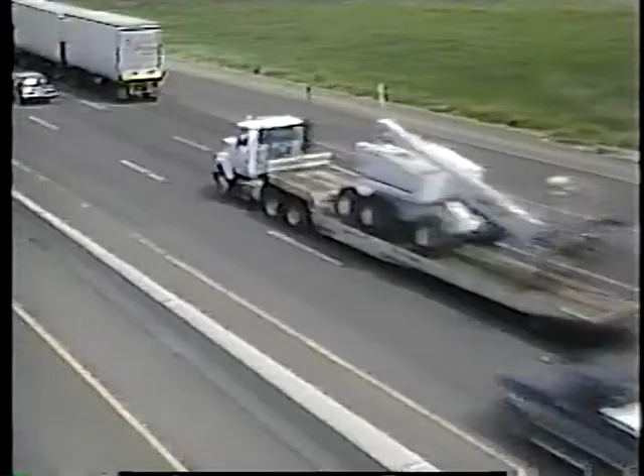Miles of roads, more cars, and more truck traffic than ever before. Most of our personal travel and freight moves over highways. The nation's economy and quality of life depend on the good condition of our roads.

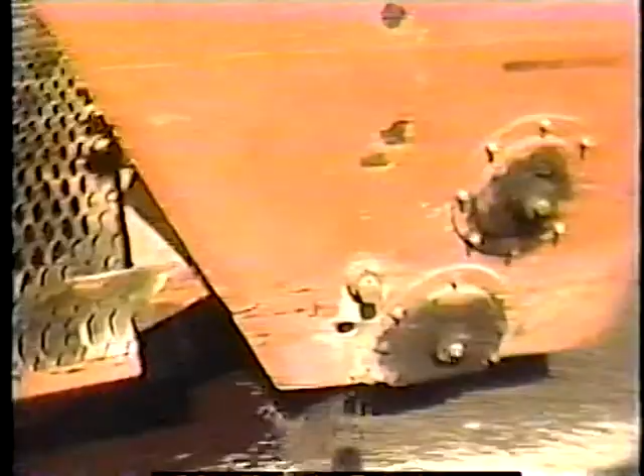Although the demands placed on our highway system have increased, the level of funding for public road construction and maintenance has remained fairly constant. As these trends continue, highway agencies will have to make ever more efficient use of the funds that they have. To enable highway agencies to meet this challenge, Congress created the Strategic Highway Research Program, or SHRP, to achieve rapid progress in highway technology.

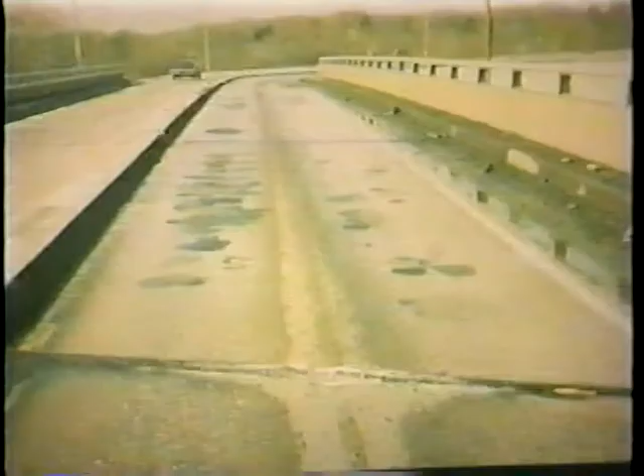SHRP is a 5-year, $150 million program administered as a unit of the National Research Council and funded through a set-aside of 0.25% of state-apportioned federal highway aid funds. SHRP is seeking solutions to common but costly problems. Problems like pavement deterioration, bridge corrosion, snow and ice control.

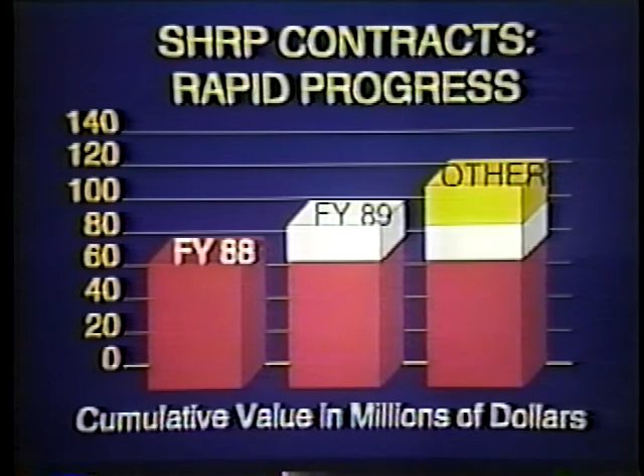The pace of activity since startup in April 1987 has been rapid. By December 1988, SHRP had awarded 64% of its budget for planned research. Most of the other research projects are scheduled to begin in fiscal year 1989. SHRP contracts are awarded on a competitive basis to researchers at universities, private companies, and non-profit organizations.

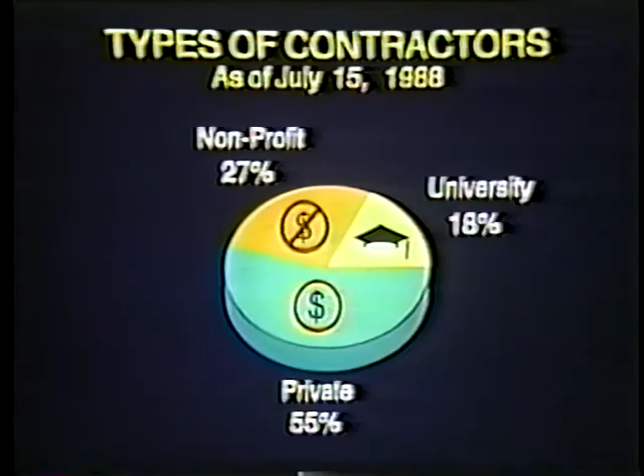Asphalt, pavement performance, highway operations, and concrete and structures were selected as target areas for SHRP research by expert panels that included representation from state highway agencies, industry, and research organizations. Let's look at the objectives in these areas and the progress that is being made.

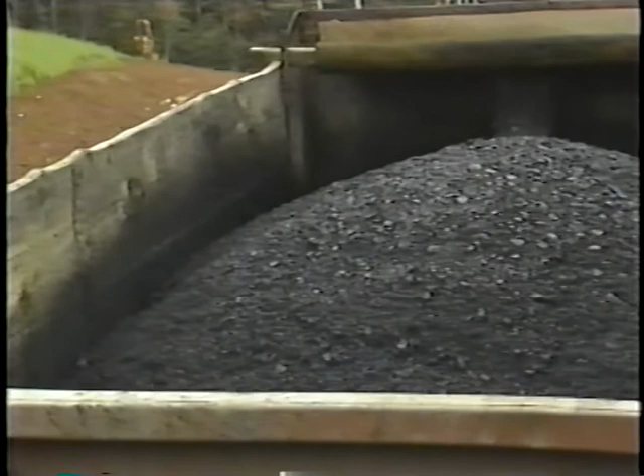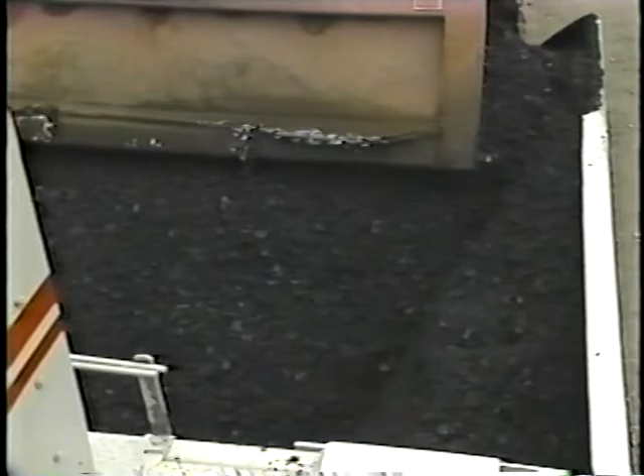Asphalt is used on 93% of the paved highways in the United States and accounts for about $10 billion a year in highway expenditures. Most asphalt pavements last about 20 years, but some fail rapidly, and these failures are costly to all involved. High-performance asphalt pavements have the potential to save highway agencies millions each year. The causes of asphalt pavement failures are often difficult to pinpoint.

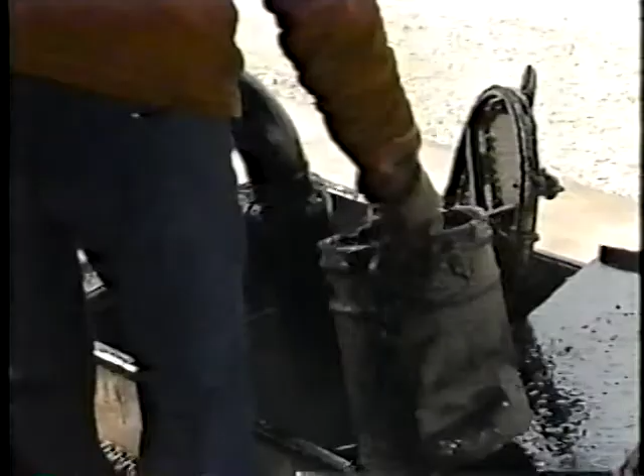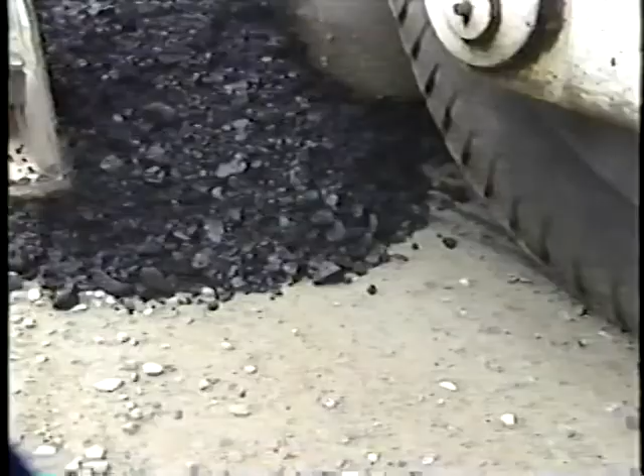Pavement performance can be affected by oil recovery and asphalt refining processes, by storage, handling, and transportation practices, by pavement mix design and construction procedures, soils, and once in service, exposure to traffic and weather. SHRP's asphalt research will focus on two key products that will improve asphalt performance: performance-oriented binder specifications and accelerated tests of asphalt aggregate mixtures.

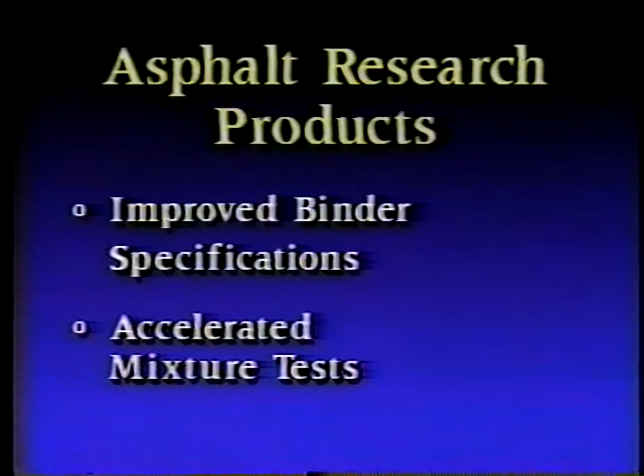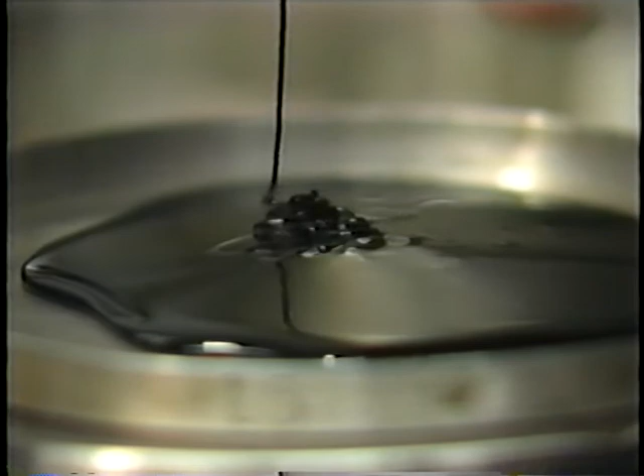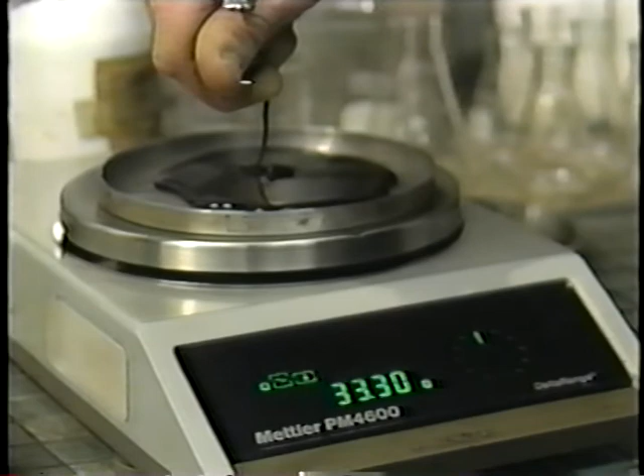The composition of the asphalt materials available in the U.S. market is highly variable because the crude oils used in the United States come from hundreds of sources around the world. This variation makes asphalt binder performance particularly difficult to predict. Dozens of different acceptance specifications for asphalt are currently in use in the United States. SHRP will develop improved asphalt binder specifications that will screen for properties more closely linked to pavement performance.

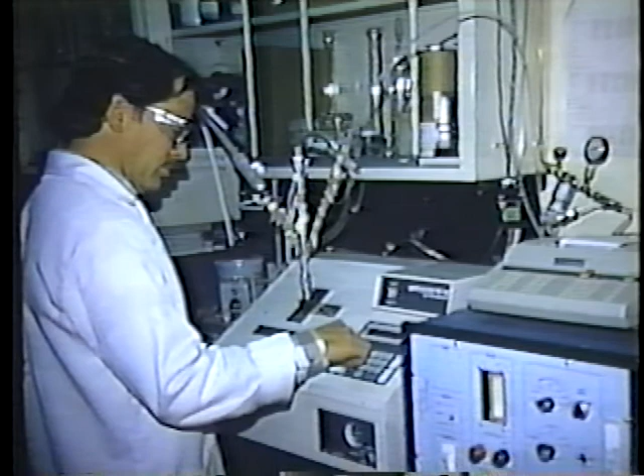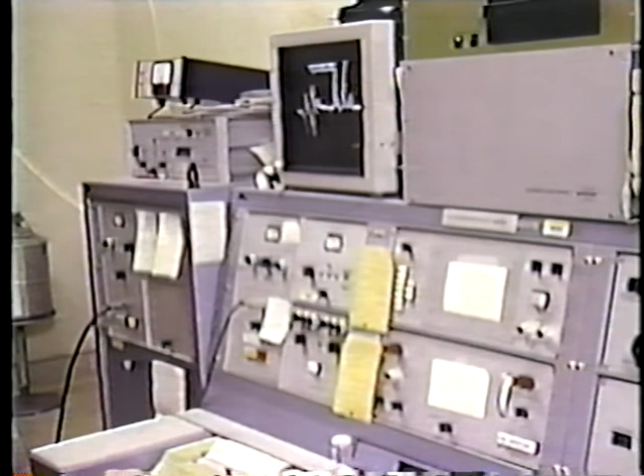SHRP's research plan starts with in-depth investigation of binder materials. Scientists at Western Research Institute at the University of Wyoming are applying sophisticated new techniques to investigate asphalt properties that may be related to adhesion, fatigue, aging, and other performance characteristics. Another high-tech approach to asphalt characterization is being pursued by SHRP under a joint project conducted by the National Institute of Standards and Technology with the University of Montana.

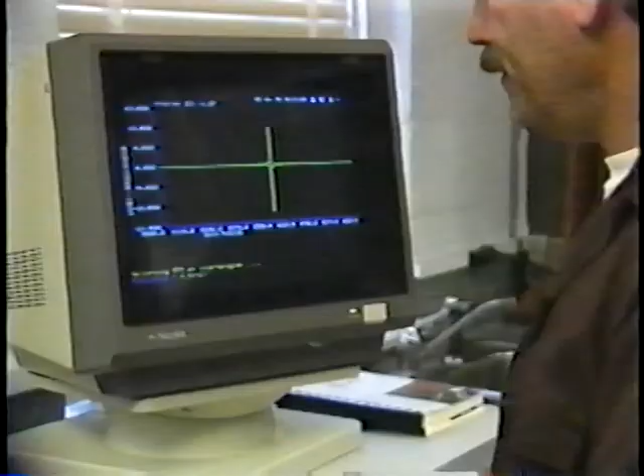They are using nuclear magnetic resonance spectroscopy to learn more about the chemical structure of asphalt materials and how composition changes under various conditions. By applying all of these state-of-the-art materials characterization techniques, SHRP is identifying and measuring the performance-related attributes of asphalt binders. The other key task is to determine how these attributes affect the performance of asphalt aggregate mixes. The University of California at Berkeley is exploring new, accelerated performance-related tests for prediction of the field performance of asphalt binders and mixes.

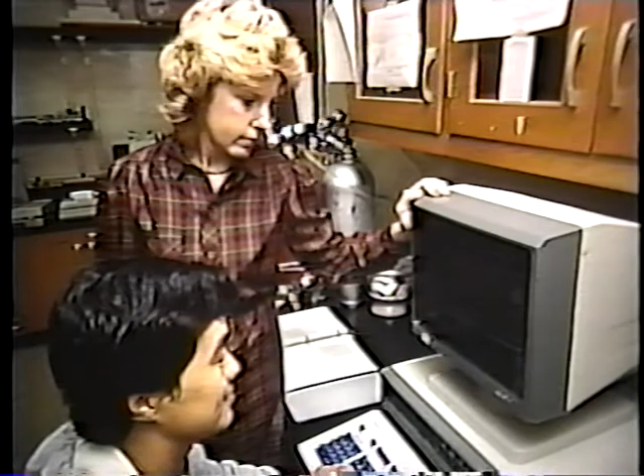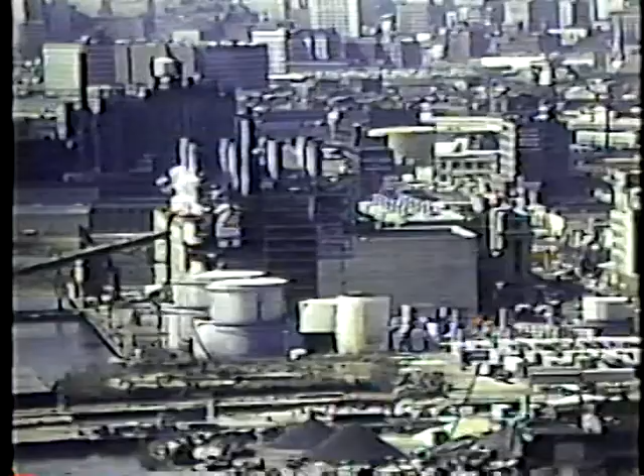Research dealing with the crucial asphalt aggregate interface is being conducted by the National Center for Asphalt Technology at Auburn University. The goal is to determine which fundamental interactions will create strong asphalt aggregate bonds. The Asphalt Institute conducted a survey of asphalt refiners in the United States and Canada for SHRP. Preliminary results show that virtually all the asphalts used in the United States and Canada are blended, and that the vacuum distillation process is used by about 2/3 of producers.

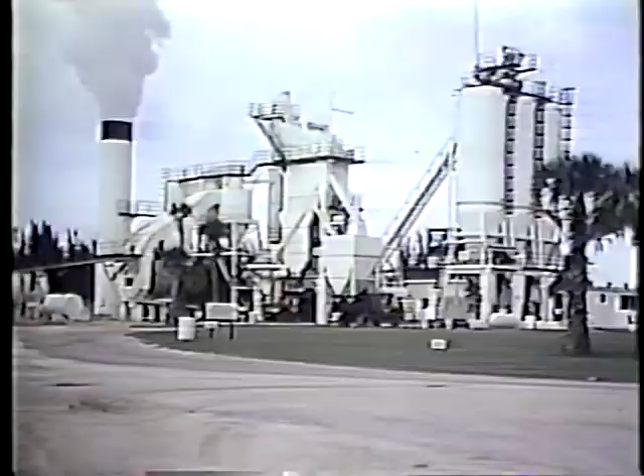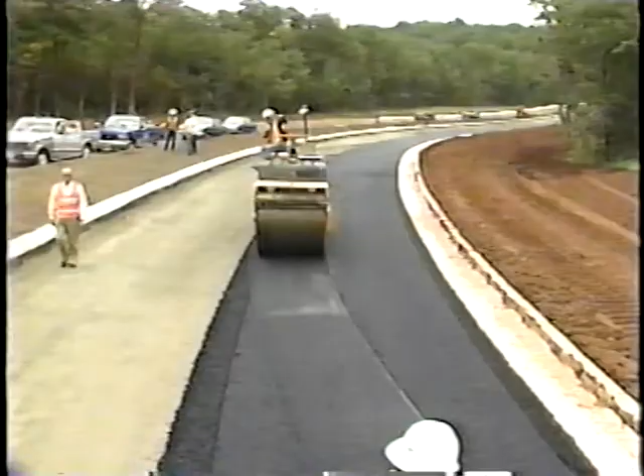To ensure the comparability of research results, SHRP maintains a materials reference library in Austin, Texas. 30 binders and 11 aggregates are stocked for distribution to researchers. Asphalt paving technology must adapt to continuing changes in the types of asphalt materials available in the U.S. market. By applying the most sophisticated techniques available to the analysis of asphalt materials, SHRP will enable industry to develop performance-oriented standards for the asphalt pavements of the future.

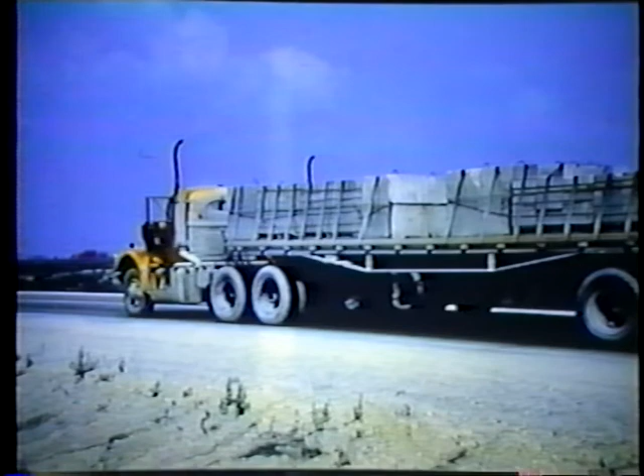Current pavement design practices are based on results of a road test that was completed more than 25 years ago. This road test was an accelerated field test of pavement performance conducted in a single location under uniform loading conditions. Trucks were driven around a test pavement and the resulting deterioration was measured.

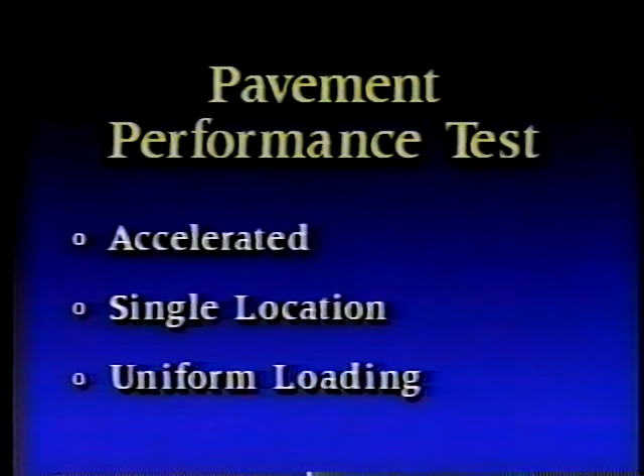SHRP's long-term pavement performance, or LTPP program, is broadening and deepening available data on pavement performance by monitoring the condition of more than 1,000 pavement sections. The resulting data will help highway engineers tailor designs and maintenance treatments to specific conditions.

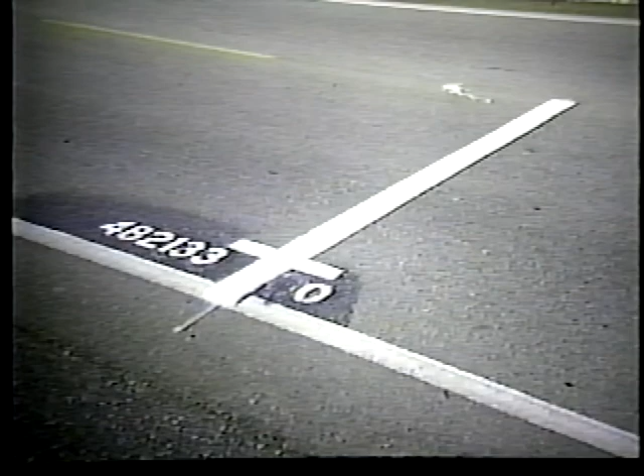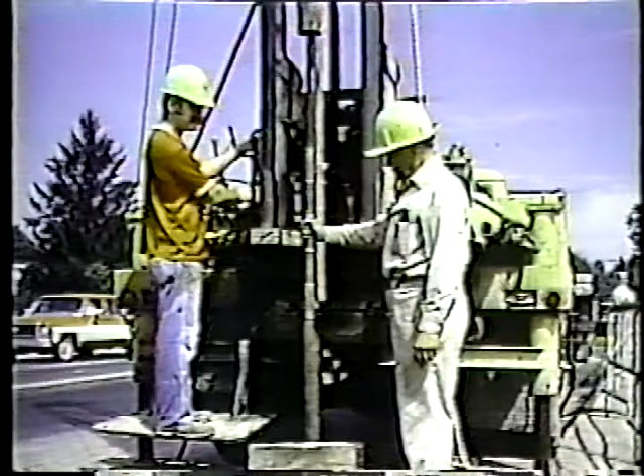All 50 states and the Canadian provinces are cooperating with SHRP by providing test sites, which are 500-foot-long sections of existing in-service highways. The highway agencies are providing SHRP with pavement design, construction, and maintenance records, as well as traffic data for each test section. SHRP conducts extensive core sampling to develop a detailed inventory of material characteristics at each site.

SHRP has purchased 4 falling weight deflectometers to measure pavement strength at the test sites. Roughness is another important pavement characteristic. SHRP's pavement profile measurement devices, or profilometers, take periodic roughness measurements at the test sites.

SHRP also takes continuous photographs of the test sections, using a camera mounted in the bottom of a moving vehicle. The photographs clearly reveal deterioration and make it possible to monitor the progress of pavement distress over time. The performance data will be stored along with the traffic and materials information in a permanent National Pavement Performance Database maintained by the National Research Council's Transportation Research Board.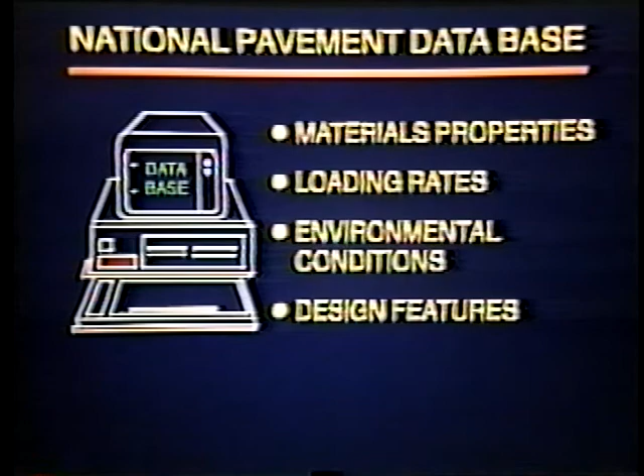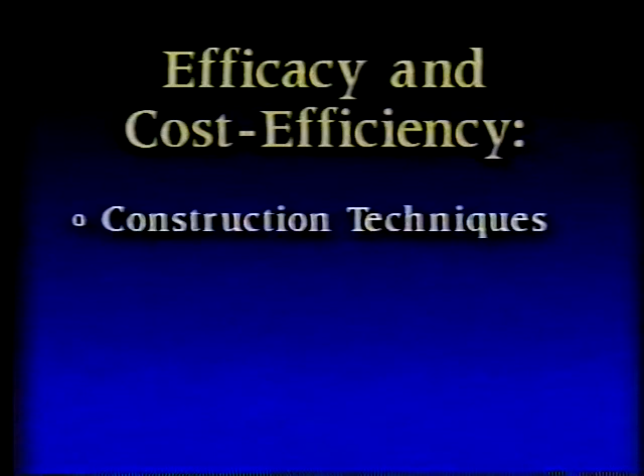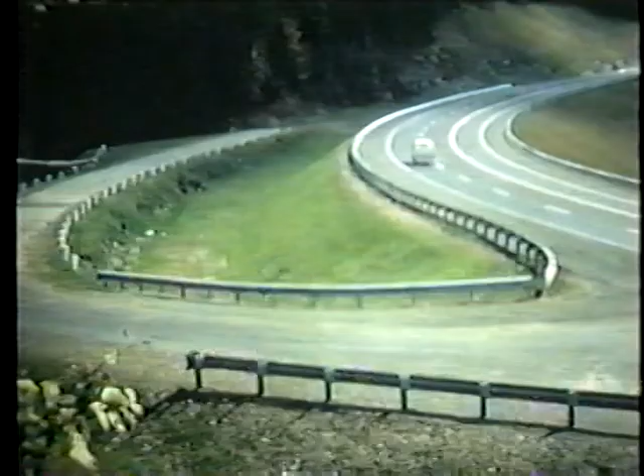The pavement performance research will yield a wealth of useful information about the efficacy and relative cost efficiency of various construction, maintenance, and rehabilitation techniques. Analysis of the data will yield equations describing pavement deterioration rates that are applicable to pavement design and to highway management decision-making. The information obtained through SHRP's pavement performance research will give us the tools needed to extend pavement life, yielding better payback on funds spent on highway construction.

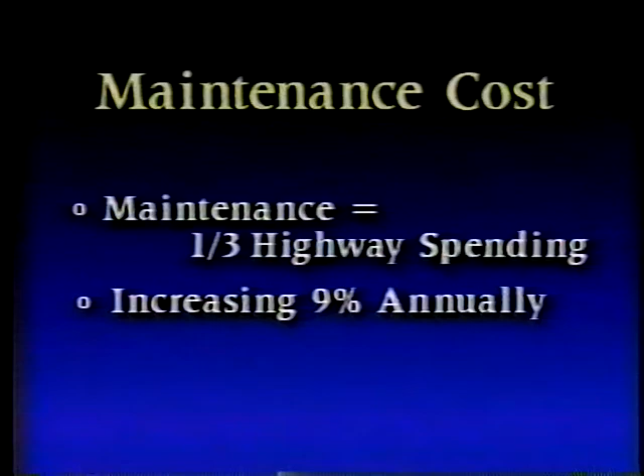Maintenance costs big money. Maintenance expenditures account for about 1/3 of total highway spending and have been growing at a rate of nearly 9% annually. It has become essential to find new ways to control maintenance costs. One way to squeeze the most out of every maintenance dollar is to select maintenance treatments that are well suited to specific pavement, traffic, and environmental conditions.

Building on experimental designs developed by Texas A&M Research Foundation, SHRP will evaluate the performance of various pavement maintenance treatments on side-by-side test sections on in-service roads. The results of the performance evaluations will be used to develop criteria for selection of maintenance materials.

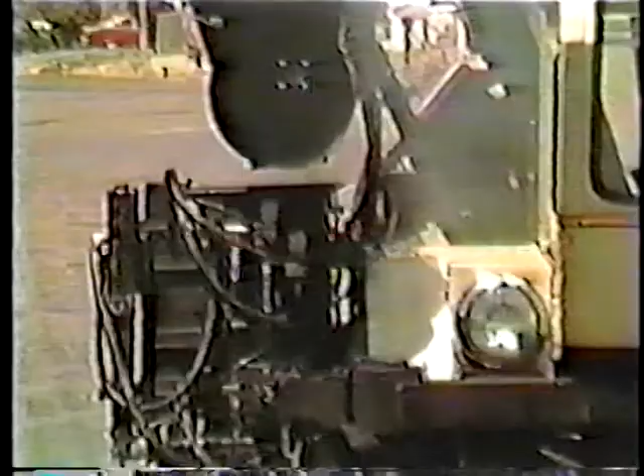Routine tasks like patching or sealing lend themselves to mechanization, but most maintenance work is still done manually, which is not only inefficient, but exposes workers to traffic hazards. SHRP is evaluating automated maintenance equipment and will determine what types of innovative equipment are most effective.

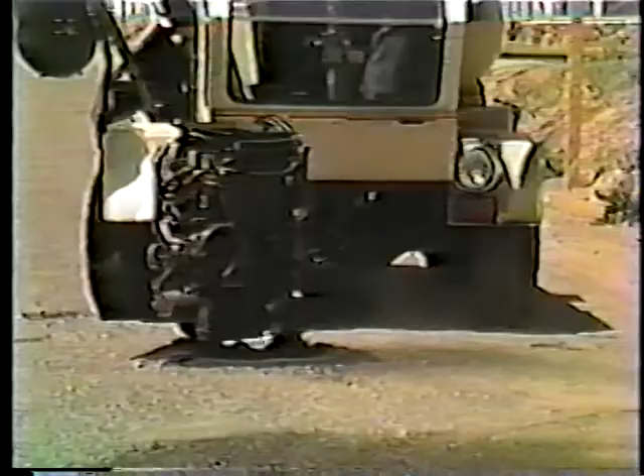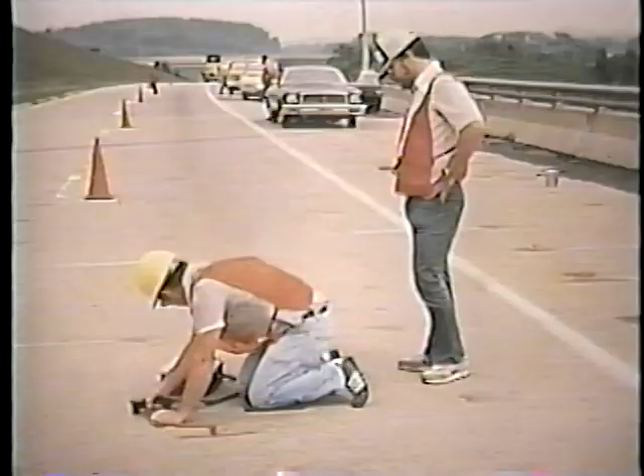SHRP also is addressing the important problem of worker safety. Highway maintenance is an extremely hazardous occupation, especially at temporary work sites without permanent safety barriers. SHRP is actively searching for innovative ways of protecting maintenance workers. Based on a design competition, SHRP will develop prototype devices and techniques to improve work zone safety. Examples of the products that might result include robotics to replace workers in hazardous positions, improved barrier devices, ways of speeding up maintenance operations to minimize worker exposure, and more effective methods of warning and communicating with drivers.

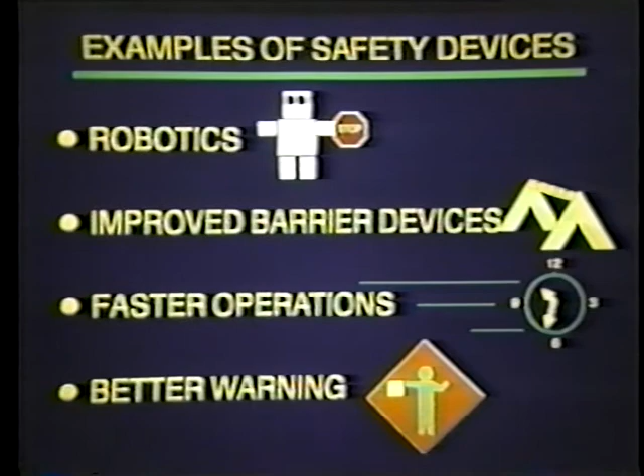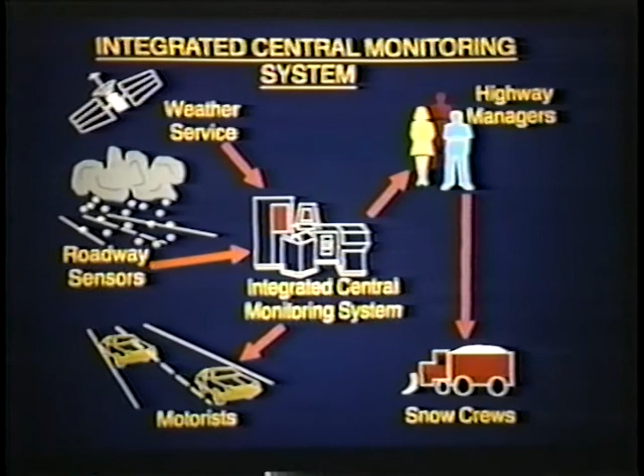Through SHRP, the latest technical know-how also is being applied to the age-old problem of the weather. The University of Wyoming is developing designs for innovative snowplows that will adapt to different kinds of snow and ice. When winter storms come, highway agencies need quick and accurate information about weather and road conditions to mobilize crews and equipment most effectively. Matrix Management Group of Seattle, Washington is developing integrated communication systems from existing components that will link weather services, highway maintenance managers, and road crews to provide nearly instantaneous coordination.

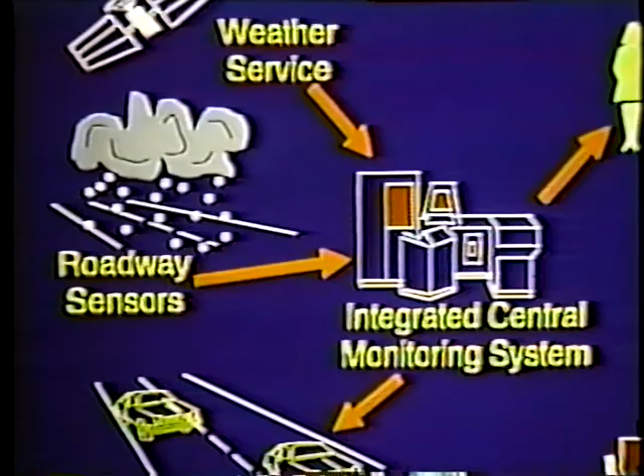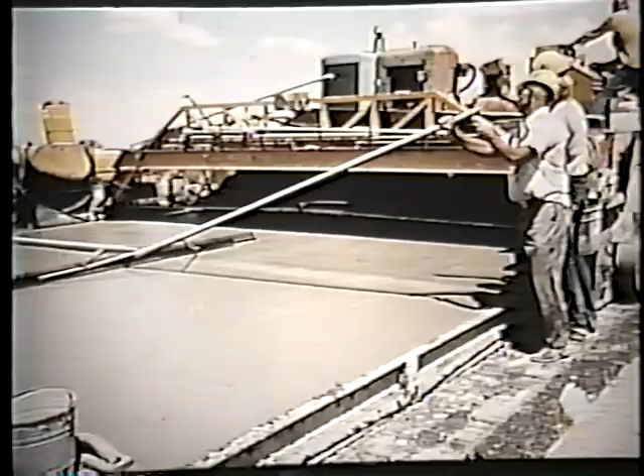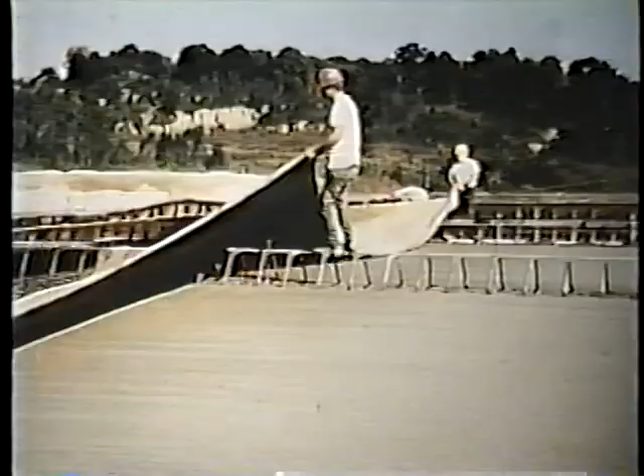Concrete is an extremely durable and strong building material. Cracks and potholes in pavements mean that somewhere along the line, something went wrong. SHRP is working hard to make concrete more foolproof and to fix what's wrong with the valuable concrete structures already in place. An investigation of cement and concrete microstructure underway at Pennsylvania State University will form the basis for many of the later products of SHRP's concrete research.

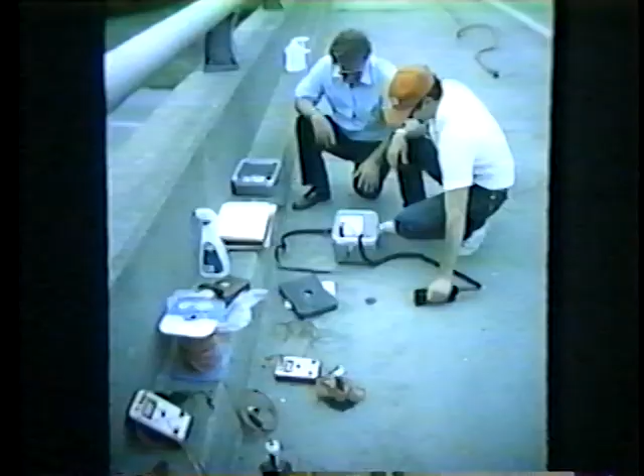Other contractors are focusing on specific performance concerns. Construction Technology Laboratories in Skokie, Illinois is investigating alkali silica reactivity problems, and the University of Washington in Seattle is studying freeze-thaw damage, including D-cracking. SHRP will develop improved tests and techniques for avoiding these problems in new construction and for correcting them in existing pavements. Non-destructive tests for condition assessment of both new and existing concrete will be a key product of SHRP's concrete research.

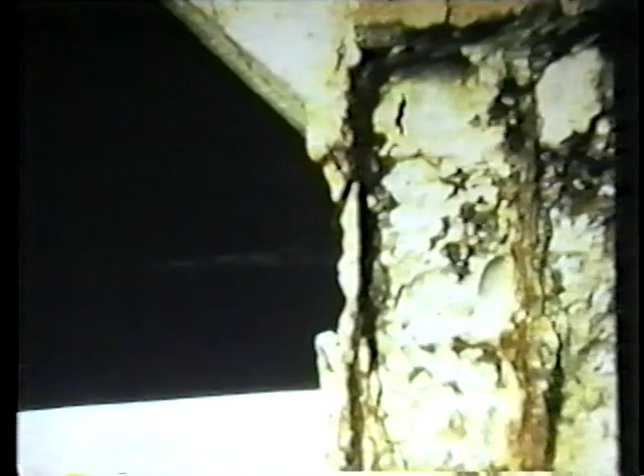Better bridge repair methods offer tremendous money-saving opportunity. Bridge repair will be the biggest bill for our highway system during the next decade. $20 billion worth of repair work needs to be done on corroded concrete bridges here in the United States. SHRP is developing some of the most promising new techniques for assessing and repairing corrosion damage, and is evaluating the cost-effectiveness of existing bridge repair methods as well.

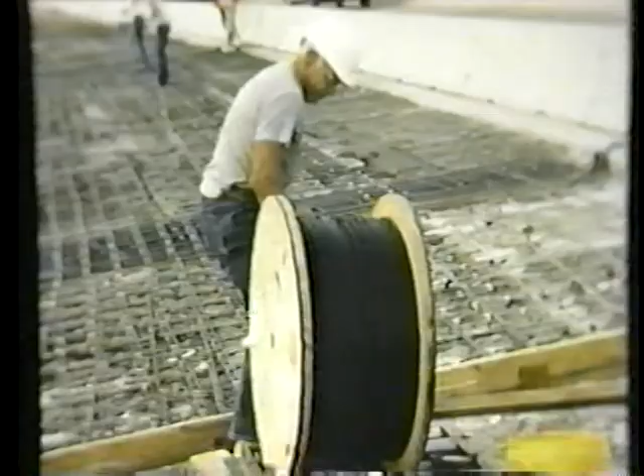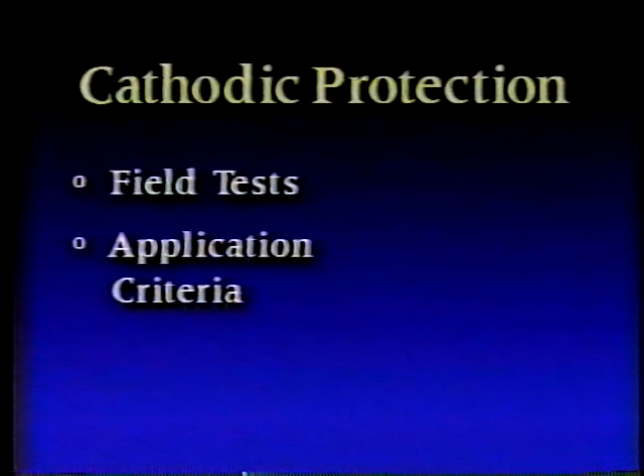Cathodic protection systems have been used on highway bridges since the 1970s, but they need to be refined to encourage widespread use. SHRP will conduct field tests on state highway system bridges and develop cathodic protection application criteria for use by highway engineers. Battelle Columbus Laboratories began SHRP's cathodic protection work in 1988. At Virginia Polytechnic Institute in Blacksburg, researchers are evaluating more conventional bridge repair methods and will determine which are the most efficient under various circumstances.

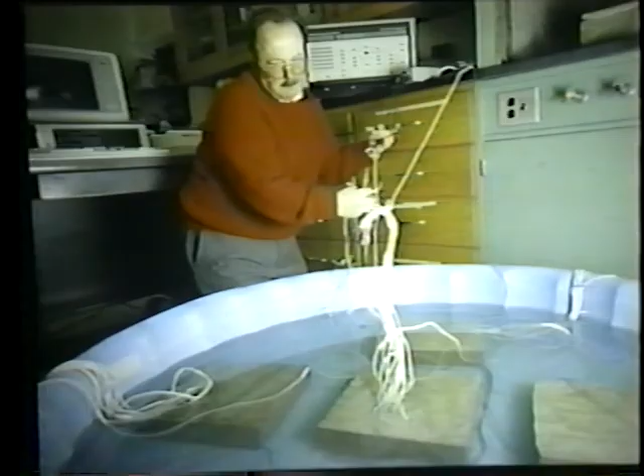The final product of SHRP's concrete bridge research will be a manual for repair of reinforced concrete bridges suffering from salt-induced corrosion. The manual will provide a rational, cost-effective approach to bridge repair.

Research progress is reported in SHRP's monthly newsletter, Focus, and findings will be published in special National Research Council reports, as well as through conferences, training manuals, and courses. As the results of SHRP's research become available in the early 1990s, state highway agencies will reap the payback from their investment of federal aid highway funds. State highway officials play an active role in administration of the SHRP program. Hundreds of state experts and others help to select SHRP contractors, to review research progress, and to test new ways of doing things.

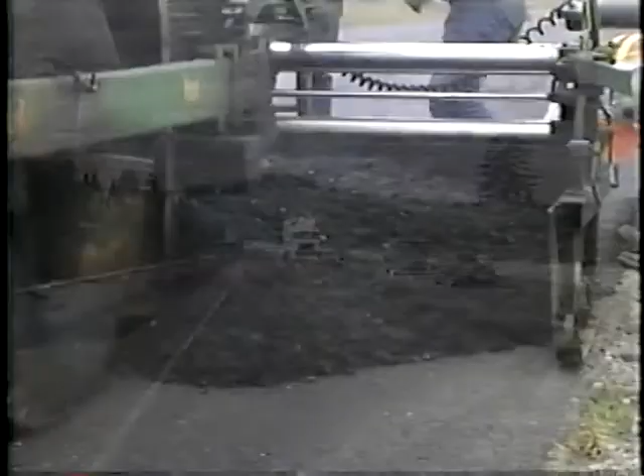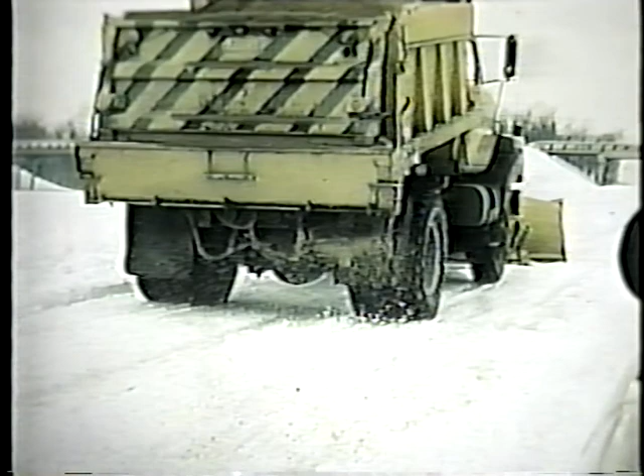SHRP is helping highway agencies save money and develop better roads in the bargain by extending the useful life of new pavements and finding better ways to fix existing ones, by fixing our crumbling bridges and keeping us moving during winter storms. SHRP is paving the way for the roads of the future.